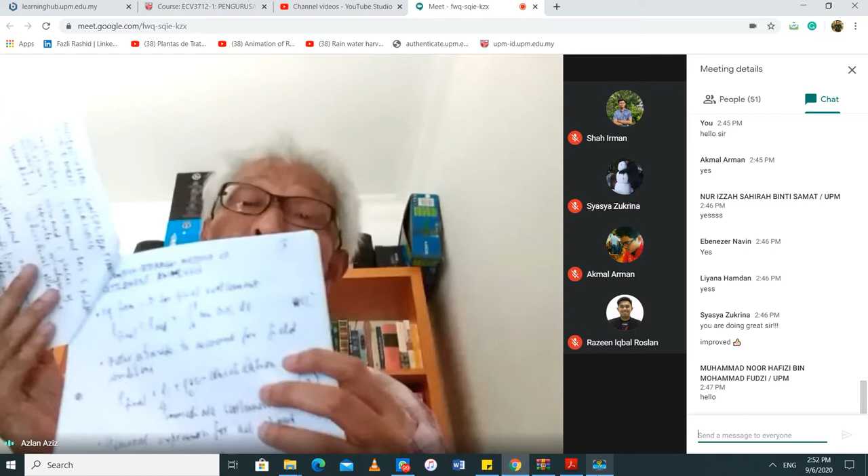Now, I sort of digressed from the main set of notes. It was supposed to go straight to page 3, but we digressed to page 2A, 2B, 2C, and 2D, because some of you may not have had the idea of what consolidation is all about, and that was why the digression was there. I did mention to you that as we went along into 2A, 2B, 2C, and 2D...

We did an example before that. We said to ourselves that the 4-meter clay is undergoing a consolidation settlement, and the question to you then is how to get the stresses at the center or in the middle of that thickness of clay. You have clay here, and because of the top part and the bottom part, you take the average in the middle. That's the depth of the stresses.

So you apply the stresses as the picture was showing you. In the example, you apply 125 kilopascal, and then how is this 125 kilopascal being distributed in this footing, which is a raft footing. You have a 15 meter by 30 meter by 45 meter footing, and the settlement obviously is going to occur in the center. So you split the raft footing into 4 equal spaces. That's why the word 4 is there in the example, 4 equal spaces.

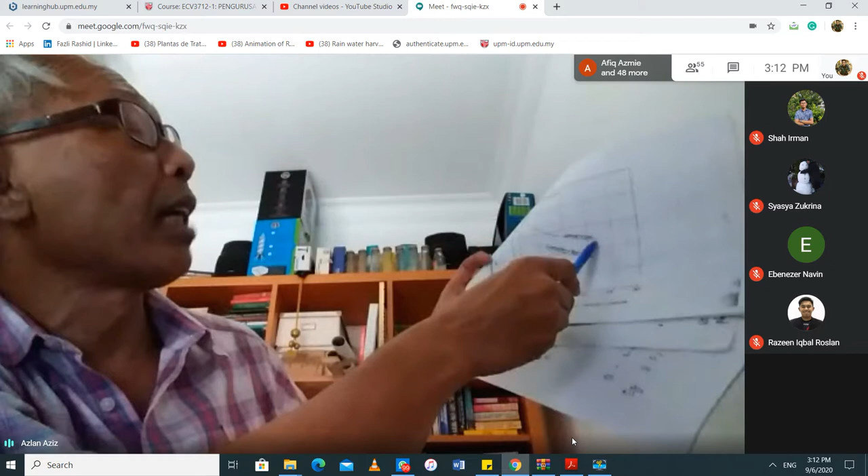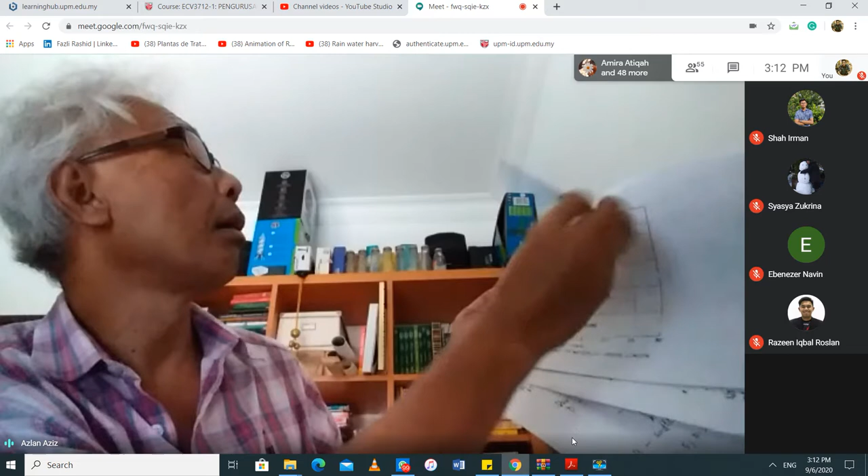Now, if you look at figure 14.2 again, just to give you an idea, let's say we use that conventional oedometer settlement. Let's say the total final settlement is about 50, and let's say the total final settlement would take some 20 years to stabilize. This is almost stabilized here, 50 stabilized, so it takes about 20 years. So 10 years after the application of the load, that's like, what is it? I'll take something like 25 so that it's easy for me to calculate. So this is about 50, say that's 20 years.

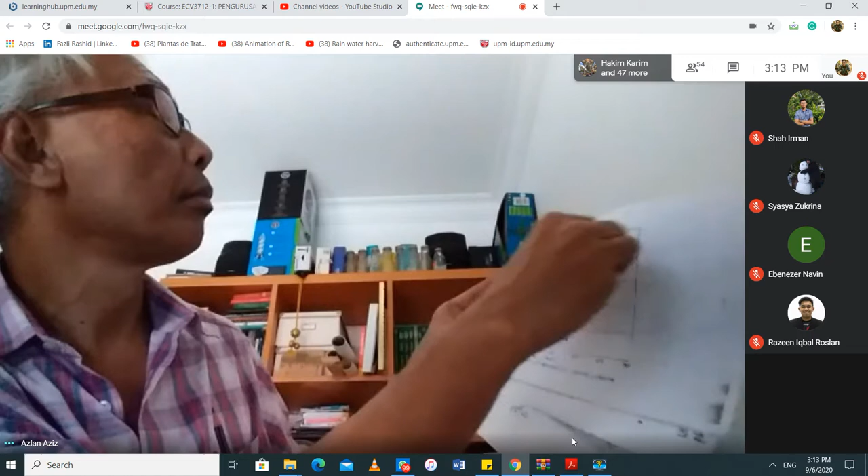So I want something that is 25, say 25 is 50% of the total final consolidation. So how many years do you get? Write to me, guys, otherwise I think you're asleep or you can't follow me. 25 millimeter out of 50, that would be... Send a message to everyone here, don't talk to me, just send a message.

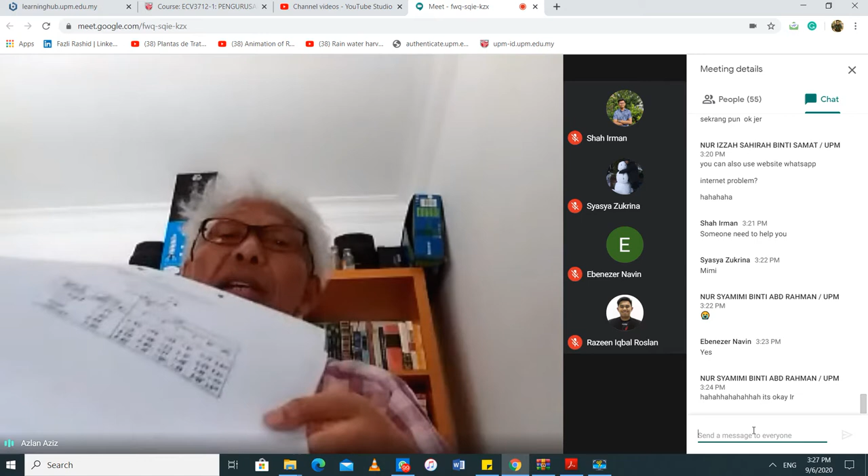I'm supposed to have 58 people, right? Where is my attendance list? Dah. Dah dapat? Yeah, I'm supposed to have 58 people, guys. I keep having 3 people missing in my class. Terima kasih. Those of us who are missing, make sure you don't miss your class on the day I ask for the homework. Then it becomes a problem. All right, so anyway, you have to...

Take the I sub P values from table 14.1, 14.2, and 14.3. Now 14.1, you guys said to me is on 14.14, but it's available even in this set of notes, right? Otherwise you're just going to look in chapter 14 and find it. Now Imran and Yuan has looked it up and they said that it is on page 14.14. I have here also table 14.3 and table 14.2. All right, but if I were to look at that table 14.1, all it says in there is the influence factors for settlement of footing on the surface of a semi-infinite elastic solid.

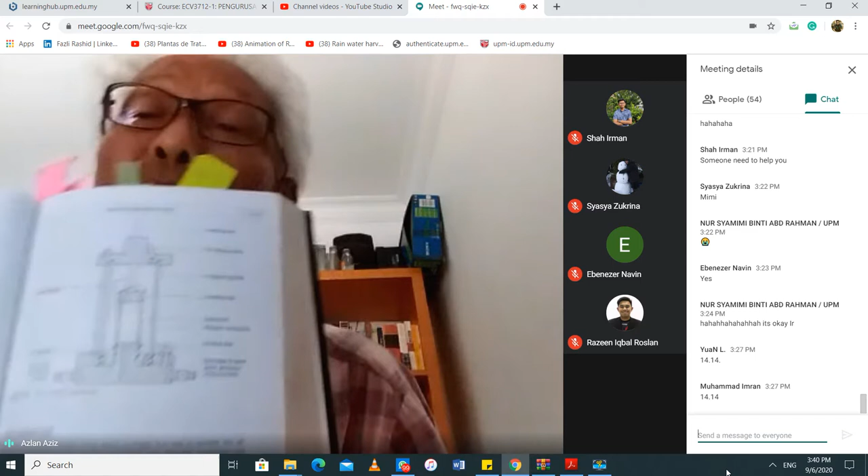So if I'm to look at page 114... okay, I'm on page 107. Remember, I drew this. Well, for some of you, some of the others are not, they didn't do soil mechanics 1 with me. All right, here's the triaxial cell.

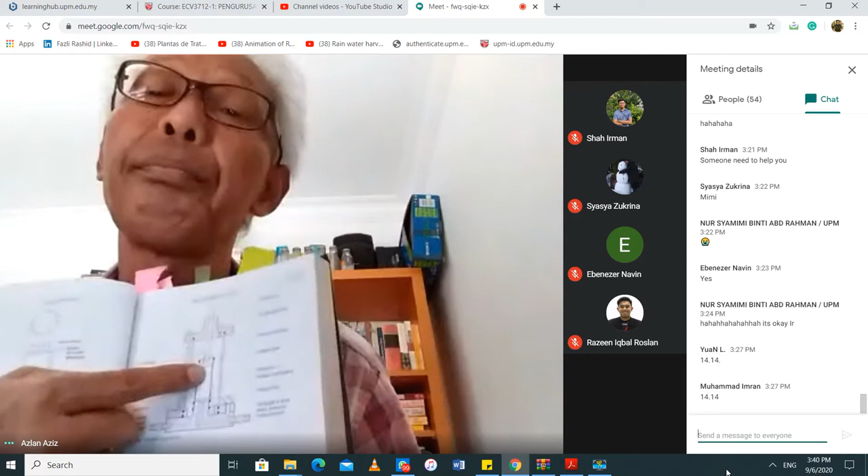Now, why am I trying to relate this triaxial cell to that B value? The B value is obtained when you apply all these lateral stresses and vertical stresses, and you can get that B value. So when they say Skempton pore pressure parameter is determined through lab test, they are using this triaxial cell on page 107.

So if the soil is fully saturated, which is the case of the clay usually, then the B value is equal to 1, and then you get all this delta U, which is the change in pore water pressure. Now, if I substitute that change in pore water pressure in the original equation, I get that mu multiplied by this long-winded parameter.

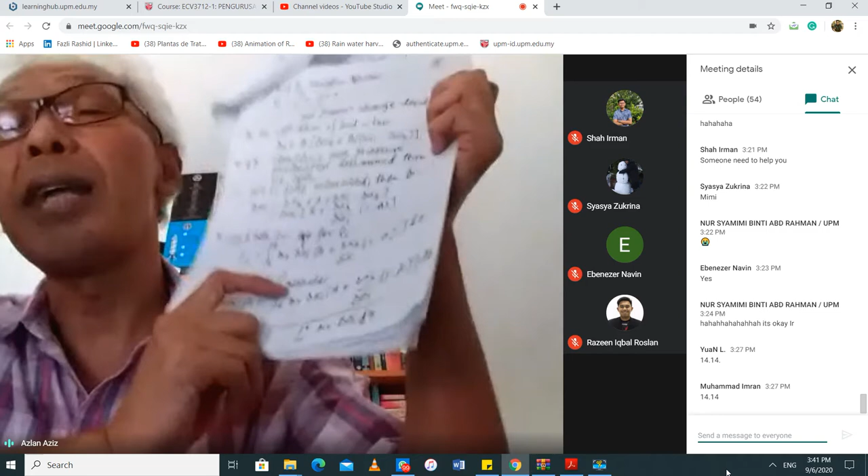In the end, you see there, right, on page 5 at the bottom here, you have this mu multiplied by rho oedometer. You recall that when I was trying to talk about this Skempton-Bjerrum method, I said that Skempton-Bjerrum would be referring to the oedometer test. And why would that be the case?

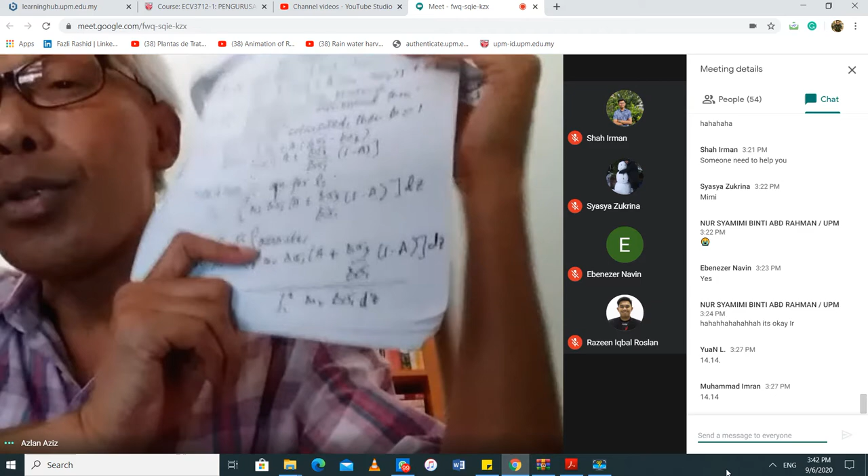It's because all of us are more familiar with the oedometer, since also last Friday we were able to calculate using oedometer results. So he has derived this equation here, whereby you find your rho oedometer, and if you do your site investigation and all you did was just take a sample, go to the lab, and did the oedometer test, and didn't do anything else because you forgot, or you are not so good at doing site investigation, whatever the reason.

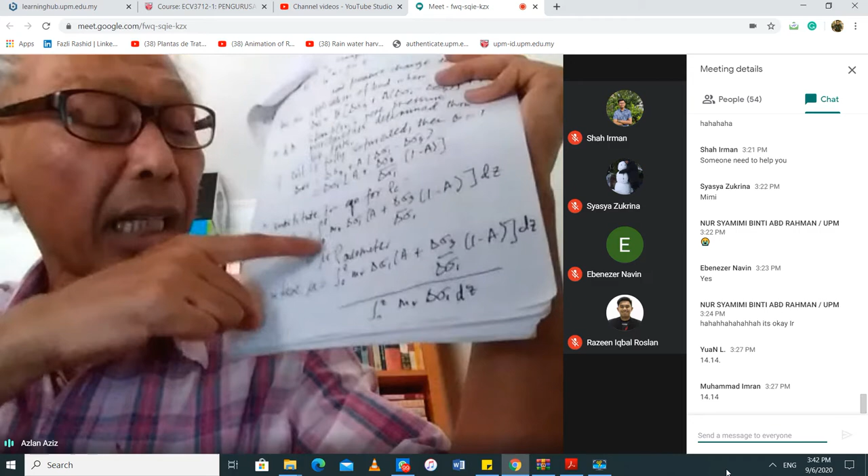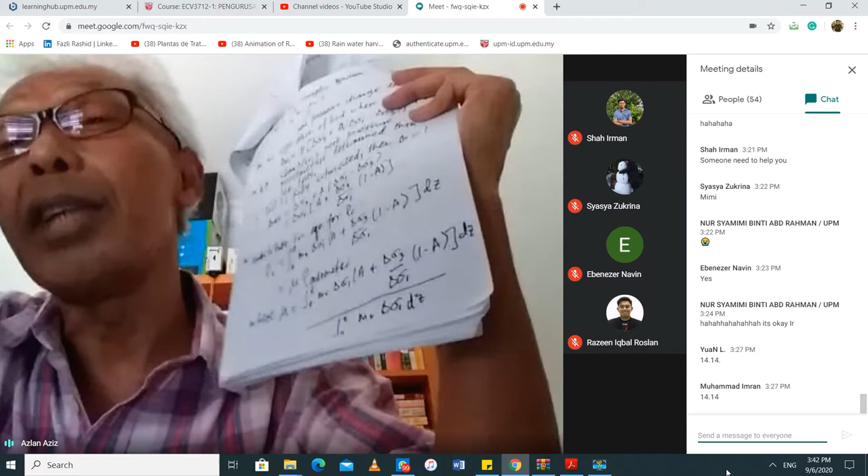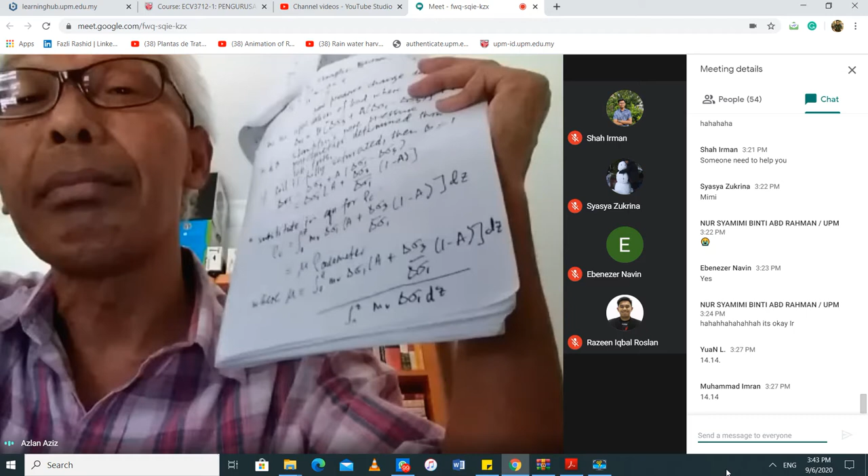So now you have that sample rho oedometer, so you can still find your consolidation according to Skempton-Bjerrum. They say by multiplying that rho oedometer with mu. All right, so you see just now on figure 14.2, I believe, in relation to the Waterloo Bridge, right? So if you had just done the oedometer test, to find that total final settlement using Skempton-Bjerrum, you just need to multiply that total final oedometer settlement with this mu, and mu is given by this.

Okay, fine, this looks so complicated. You say to yourself, by the time I get to 50 or 40 or whatever, I've forgotten how to even differentiate and integrate. So you are an engineer by that time, and you might not be able to do that anymore.

But don't worry, Skempton says and Bjerrum says, I am going to give you a chart, charts and tables. So you see that table 14.4 is going to give you the value of alpha. I'm already on the next page, guys, I'm on page 6, right? Okay.

Right, that mu is a function of, on the next page, on page 6, A plus alpha times 1 minus A. So if I were to look at these two, figure 14.9 and table 14.4, I can get my mu then, right? Now our problem is, of course, how to use this, how to use this in finding the settlement.

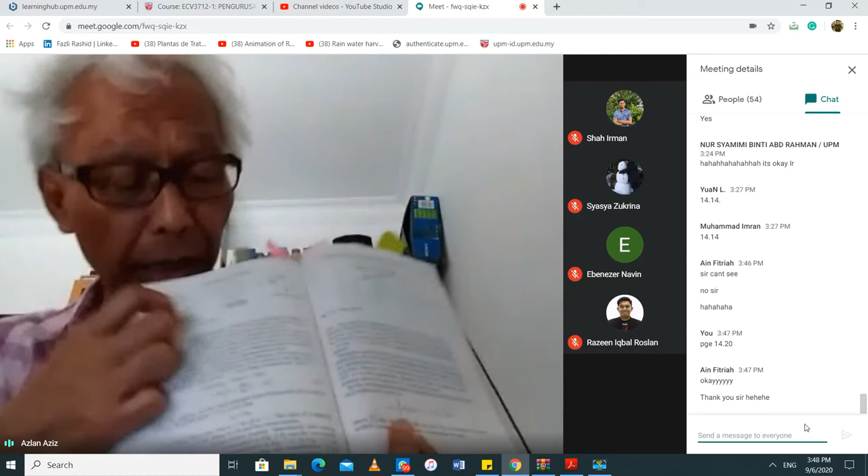Right, all those things I explained on the triaxial cell, you notice on page 256 you have the A and B factors and the increase in lateral and vertical stresses.

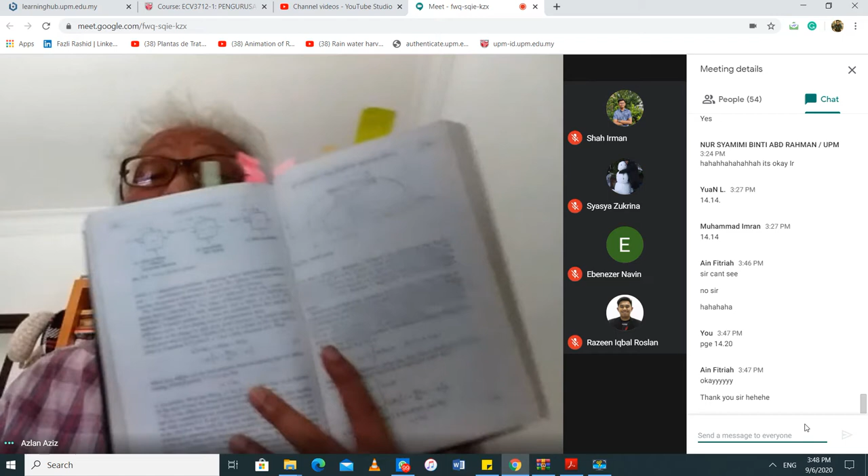Now, on page 259 is a similar chart to figure 14.9, circular footing and strip footing. In figure 14.9 you only have circular footing and strip footing, but most of the time we have square or rectangular footing.

So how then? In one of the examples in Craig's book, or sometime in the future if I get to that example, you can still use the same chart, but you change to an equivalent area. You make the circular footing equal to the square footing: one is pi d squared over 4, the other is length times breadth, or b squared if it's a square. Then you find the equivalent diameter d.

Some people ask me, the chart gives circular footing but I have square footing, what am I supposed to do? I'm warning you about all of these things so it is possible to handle all of that.

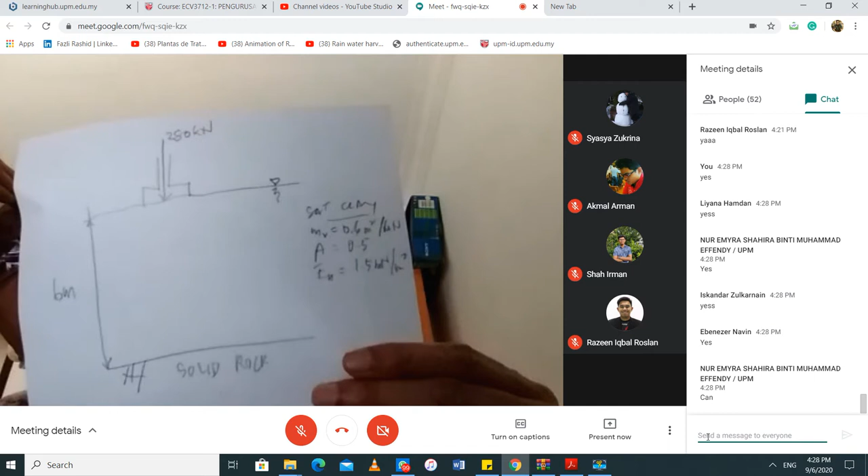Okay, so I've drawn the first paragraph and second paragraph into my schematic, right? So you should get something like that. Can you see this? Hello - Liyana says yes, Emyra says yes, everybody says yes, Ain says hello. Okay, so you get something like that, right? About right?

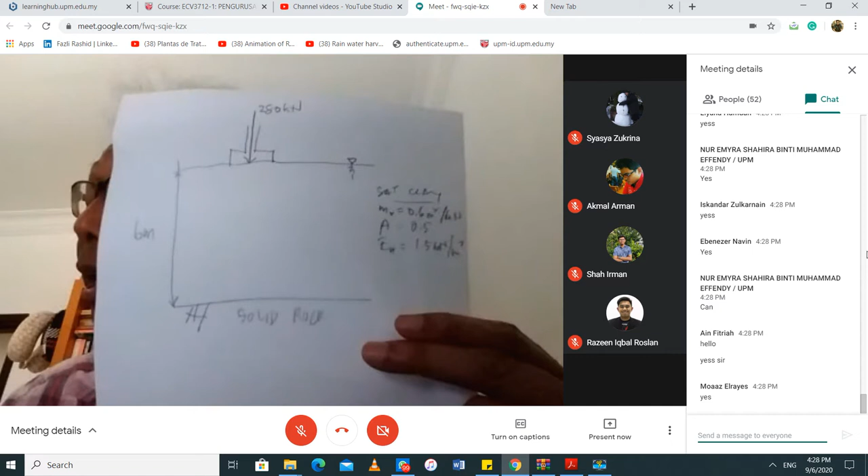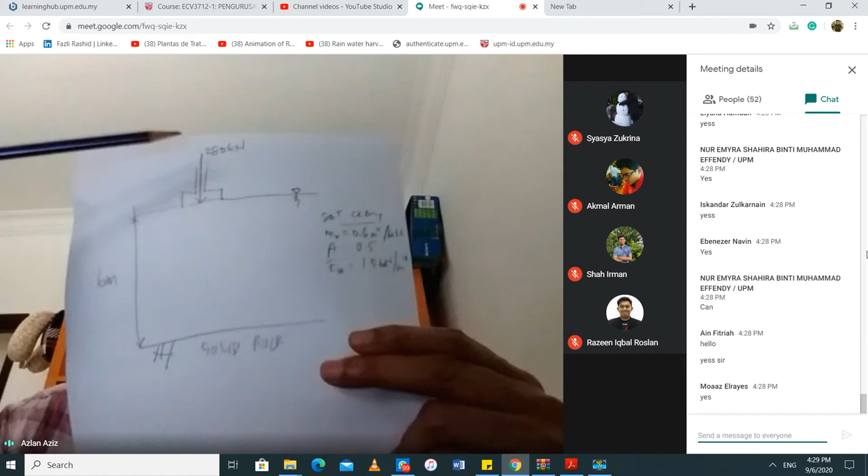Okay, now the third paragraph. It says you're going to calculate oedometer settlement by means of the 2:1 stress transmission approximation discussed in section 7.5. The calculation based upon 3 two-meter thick clay layers are tabulated below. I'm tired, guys. Okay, first focus on that 3 two-meter thick clay layer - I want you to draw it. I have a vertical load being applied to my 6 meters, then divide the thickness into...

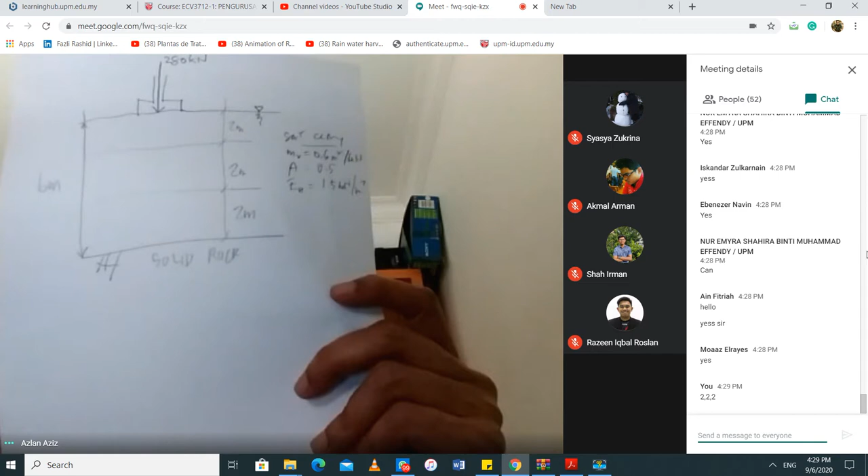Okay, that should be easy. So you should get that. Right, so it should be something like this. See, I have 2, 2, 2. This is still the same clay, and I have solid rock at the bottom here.

Now it says the oedometer settlement of the 2:1 stress transmission approximation, discussed in section 7.5. If you don't have that with you, section 7.5, I want you to now take your Craig book, and then open to this page. It's not going to be the same thing, but it's for you to understand what I'm trying to say.

I'm on page 345 and I'm looking at figure 8.23. It's about piles, but you know, the picture is similar.

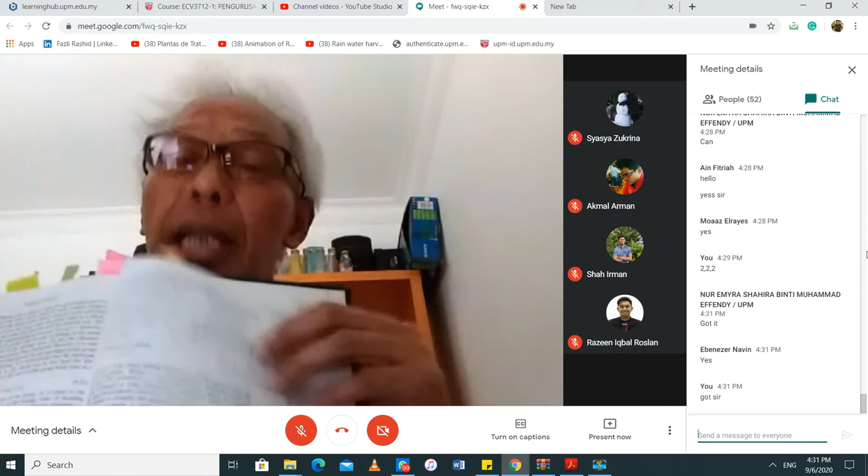Can you give me an indication that, okay, Emyra says she's got it. Anyone else? Abby says yes. Okay, now you see here, all right, I just show here. Okay, Fazli got okay. You see this? All right, it is piles.

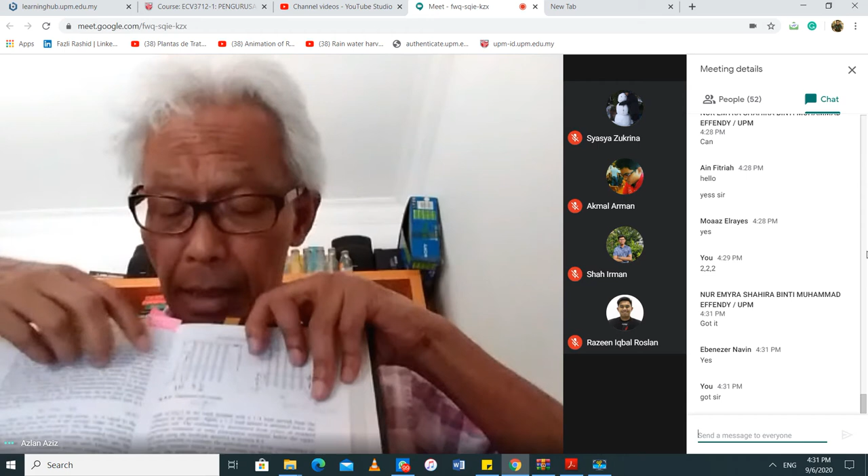But what they are trying to say here, I'm jumping the gun a bit, all right, I'm bringing forward some of this knowledge. But what is important is for you to realize that they have two layers here, for example, in this one here. And then they have the pile on top of the pile cap, they have the pile. But you notice that they have this ratio of the stress transmission on the side, 1:4 and 1:2.

Can you focus on that and tell me that you're actually getting it? Akmal says yes, Fazli says yes, Amy says yes, Abby okay, Ain says yes.

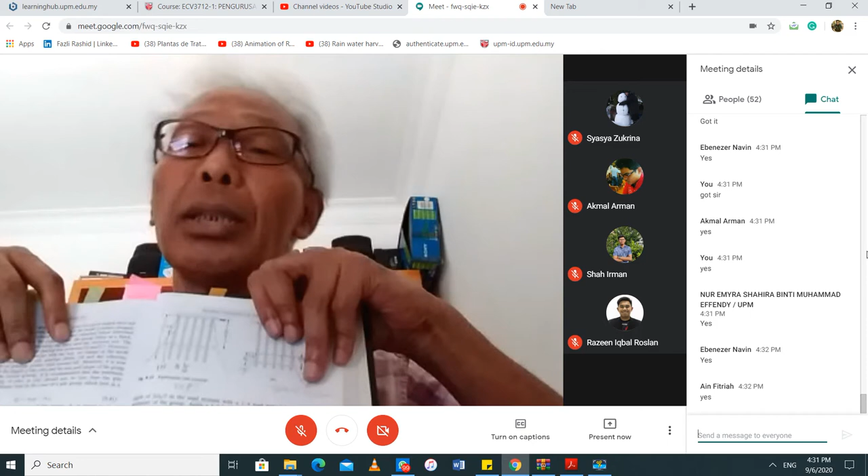All right, now when they said, going back to our example, when they say by means of the 2:1 stress transmission in that paragraph, they mean that 1:2 on page 345. So actually 1 is the horizontal and 2 is the vertical.

Okay, are you guys clear? Okay, Fazli says okay. So can we draw that?

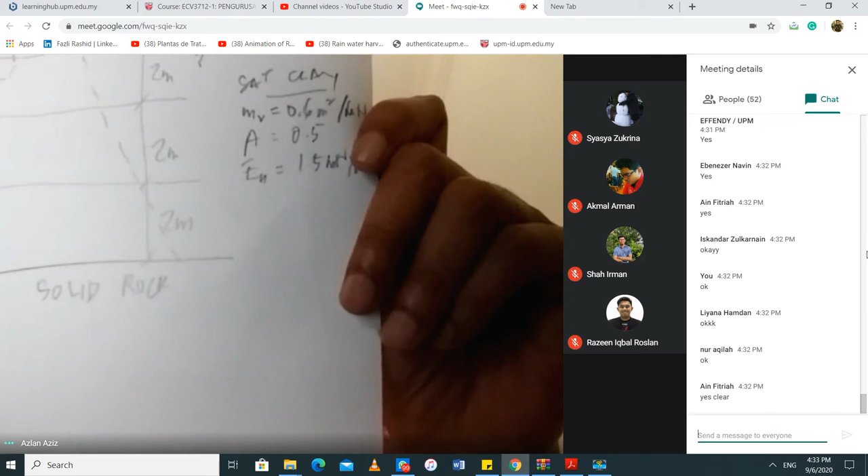I don't know whether I'm right. You guys have to tell me because I'm half asleep already. I'm tired.

Clear, tak clear? Amy says okay, Hafizi says jap sir. Shafiq says clear. All right.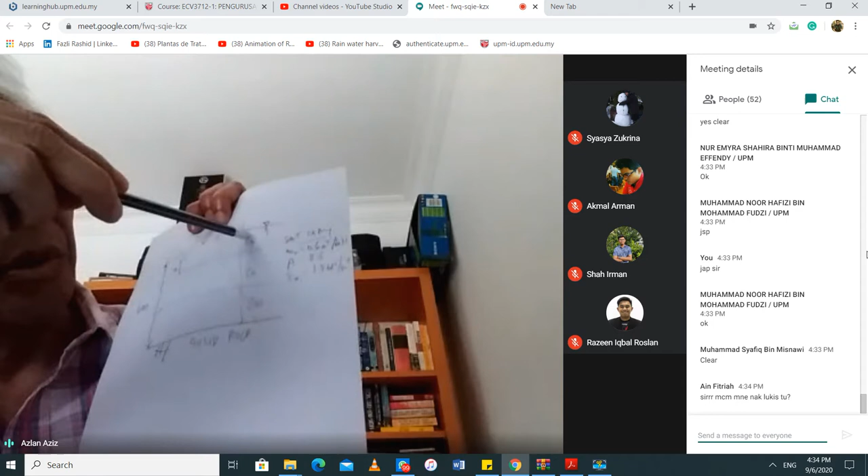Okay, now fine, all right. So now I have these three layers of the same thickness. This is the same thickness. What I'm trying to do now is find for each of this small layer, I have 6 meters initially, I'm going to find the settlement in the first layer, the second layer, and the third layer.

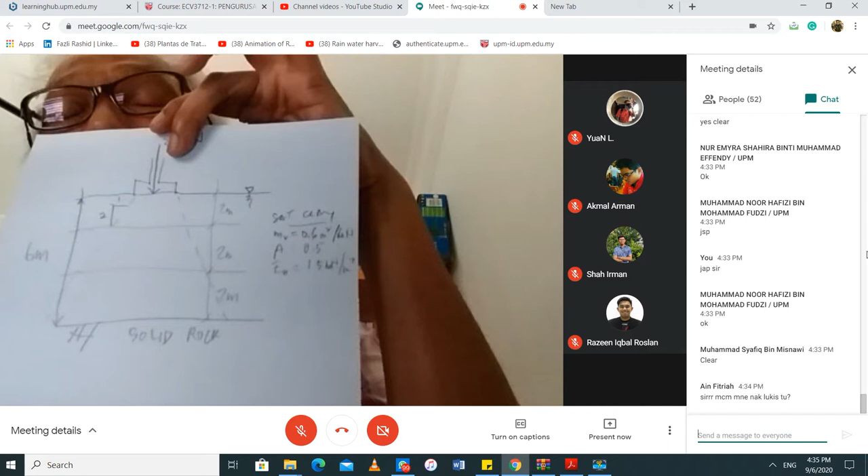See, you draw this, fine, 1:2. Why is it so important for you to do this?

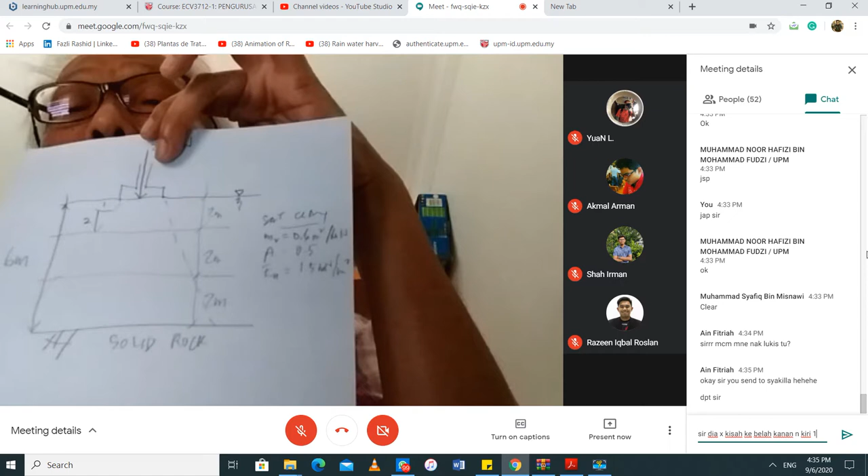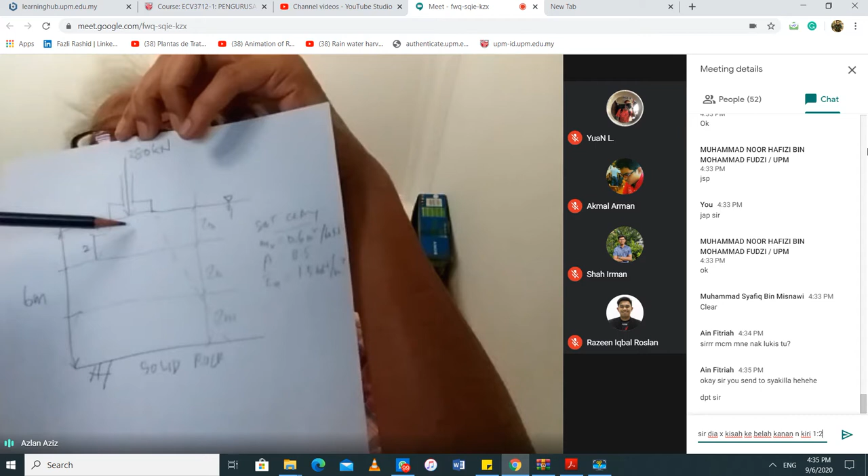It's because, all right, my next step is to say to you, okay look, there is this vertical load, which can be changed to a stress, all right. So it's just a load divided by area, and then it's going to be transferred to the first layer, to the second layer, to the third layer. So as I get further away from the surface, my stress should be less, because I'm further away from the stress.

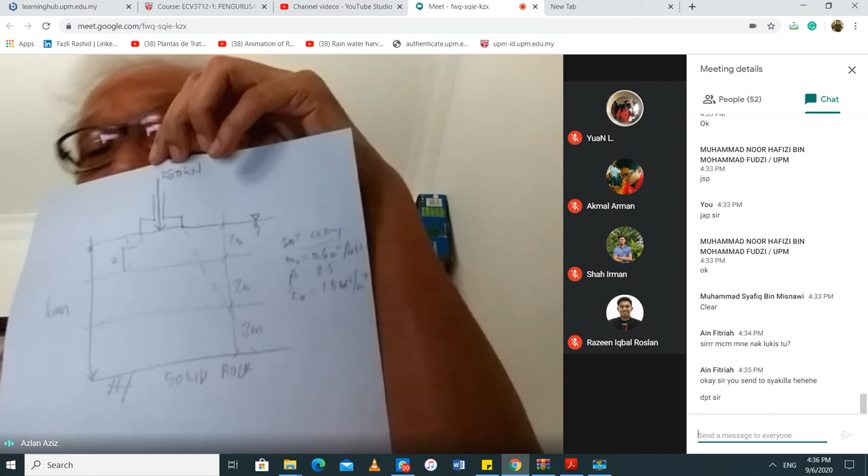Okay, now I want you now to focus on the halfway point of the first layer. In other words, my depth now is 1 meter from the surface.

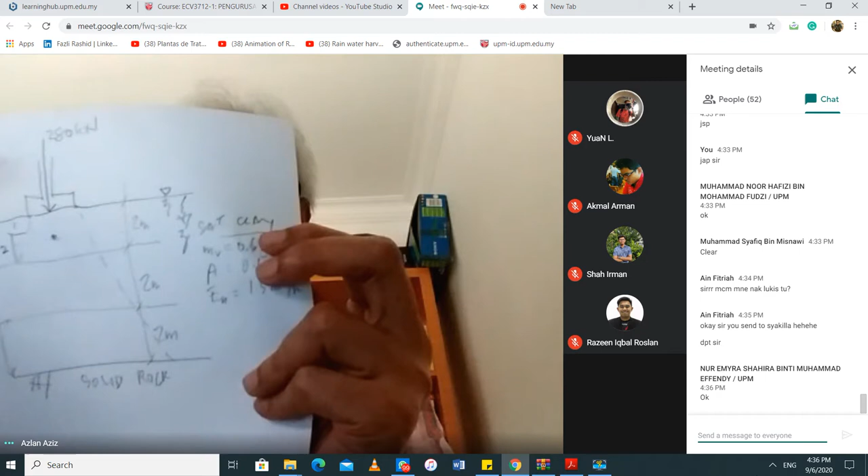Okay, all right, so now I am going down. I'm going to put a symbol Z. See my symbol Z here? And I'm going down, Z is 1 meter. See, Z is 1 meter somewhere here.

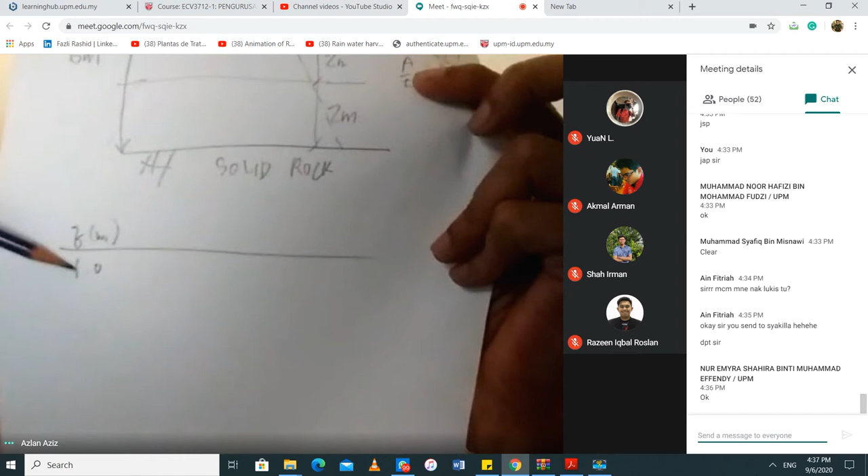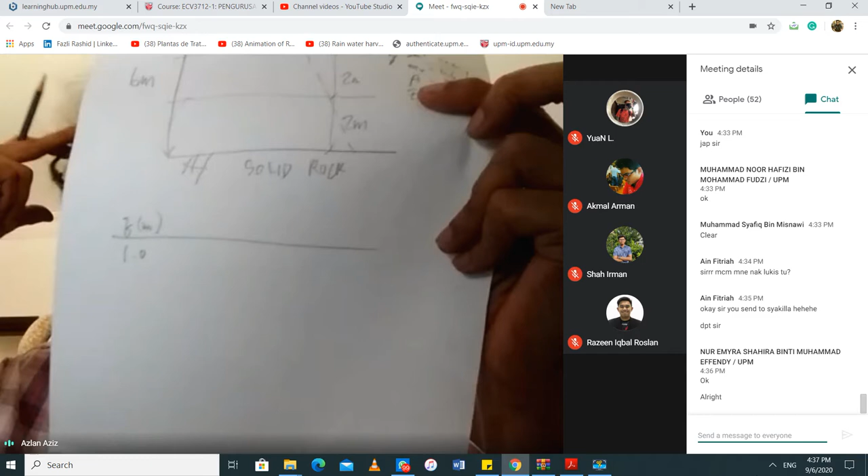Okay, so I'll put in my table Z equals 1 meter. See my table now, Z is 1.0 meter. All right, are you guys okay?

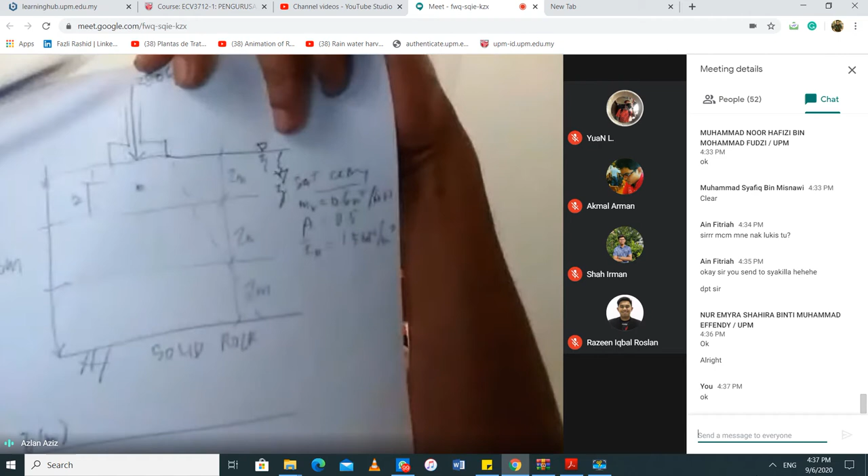At Z equals 1 meter, using that 1:2 stress transmission, I want you to tell me what the area is, what the width is at 1 meter depth. In other words, let me go back here. See, I have this footing on the surface. I have a width here, which I hadn't put in.

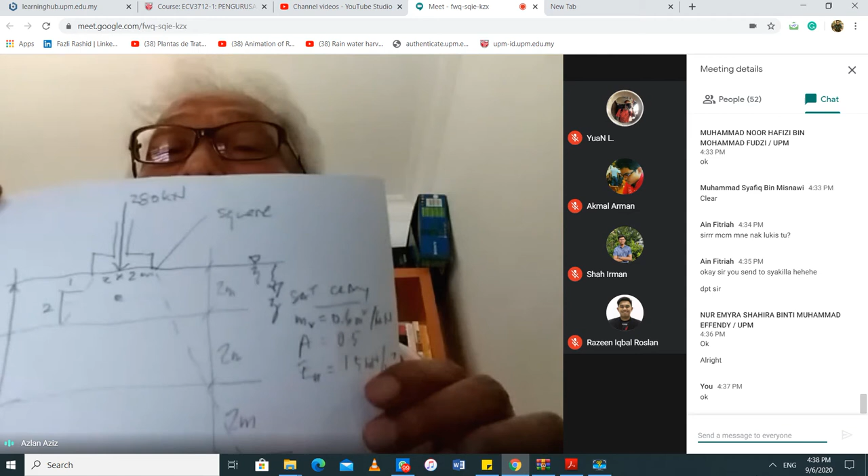So if I go back to paragraph 1, it says 2 meters square. So I'm going to put there 2 by 2, 2 by 2 meter square. See now, I have a square 2 by 2 meter. Can you see it? Nampak tak? Okay, Emyra says nampak, Iskandar says nampak, Liyana says nampak, Fazli says yes, Ain says nampak.

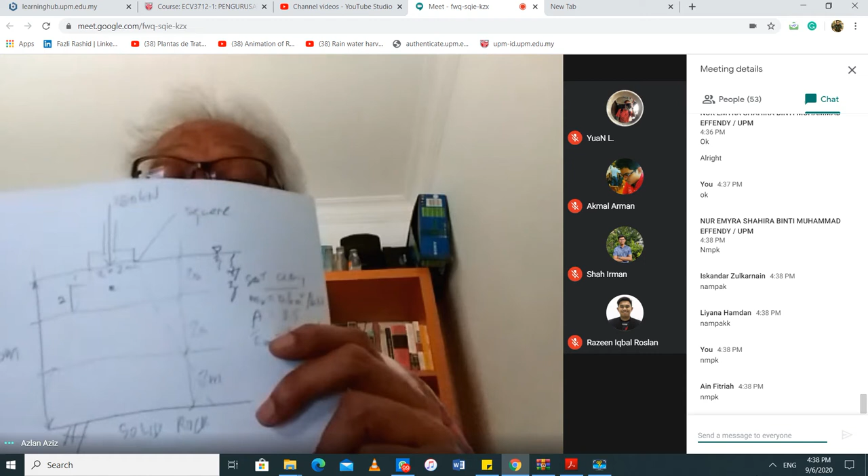Okay, now this is at the surface. Now Z is 1 meter. What is the width here at 1 meter? And ratio 1:2, width.

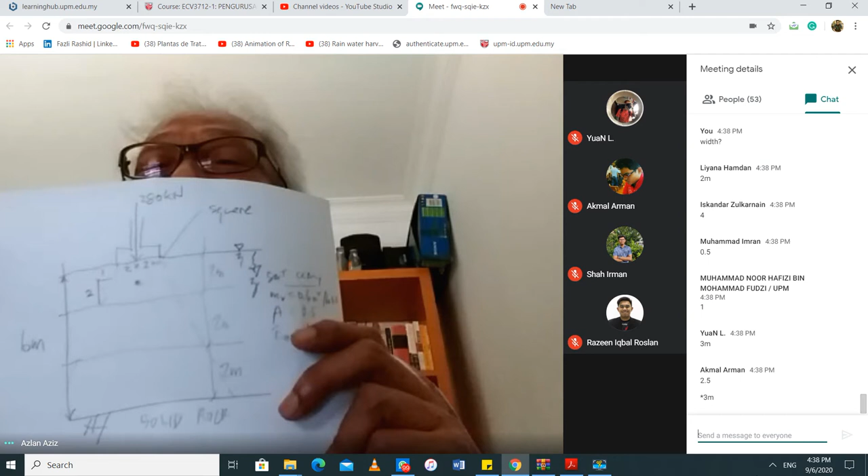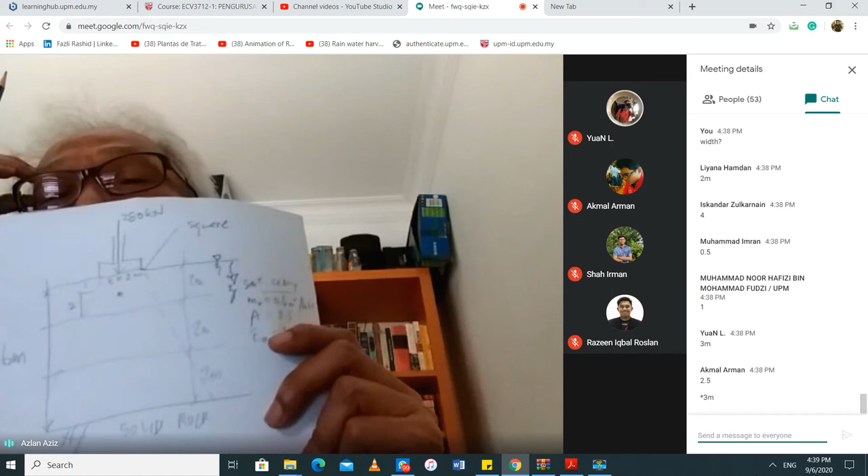Liyana says 2 meters. Iskandar says 4 meter. Imran says 0.5 - 0.5 terbalik kot. What is the width? Be careful, calculate carefully. Arman says 2.5, maybe 3 meter now. I don't know, are you sure now?

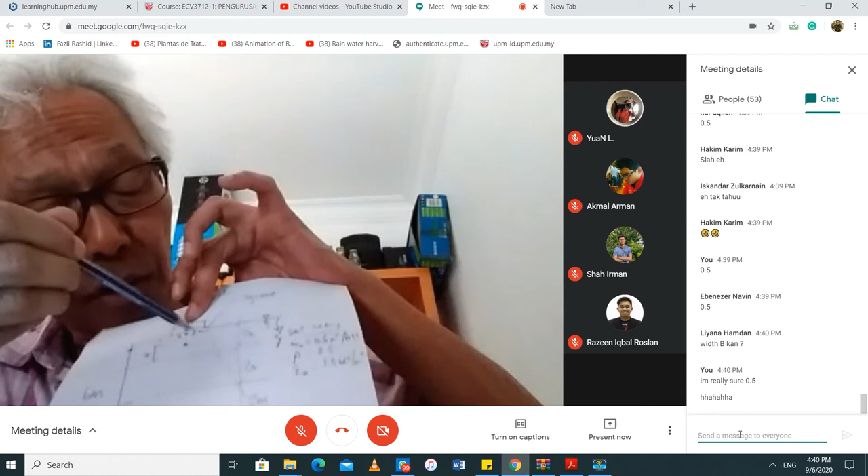0.5, no way. 0.5 is not the total width, AB. The total width at the top here is 2, so the top here is 2 meter. Okay, now 1 meter down, it has to be more than 2. Sure? 0.5 is wrong, Bazli. It has to be more than 2, isn't it? Now Iskandar says 4, Abby says 3, Razeen says 3. Yeah, sure now?

Okay, all right, so that's where the important thing is. Maybe after this you discuss among yourself. So now, I want to find the width at 1 meter. Why 1 meter? 1 meter is in between the surface here, 2 meter thickness. All right, I want to find the width.

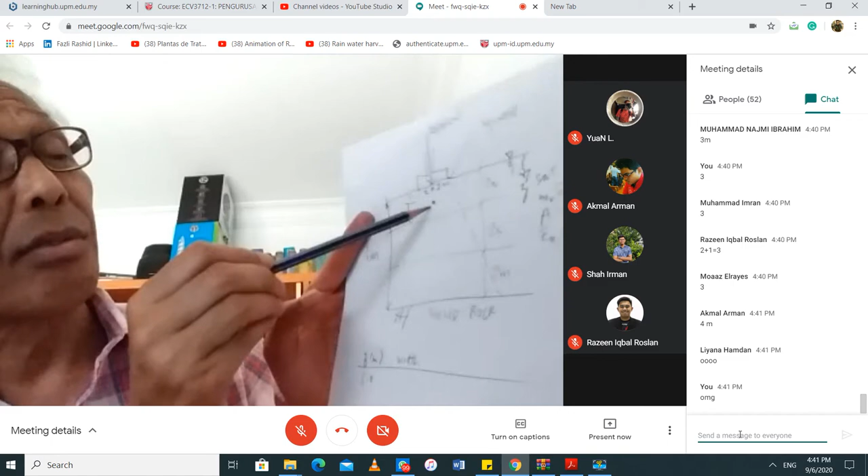Now, at the surface, you see the surface here, 280 divided by the area will give me the stress. Okay, 280 divided at surface - I'm just going to write here. 280 divided by 4, which gives me 70 kilonewton per meter square, kilopascal. That's at the surface.

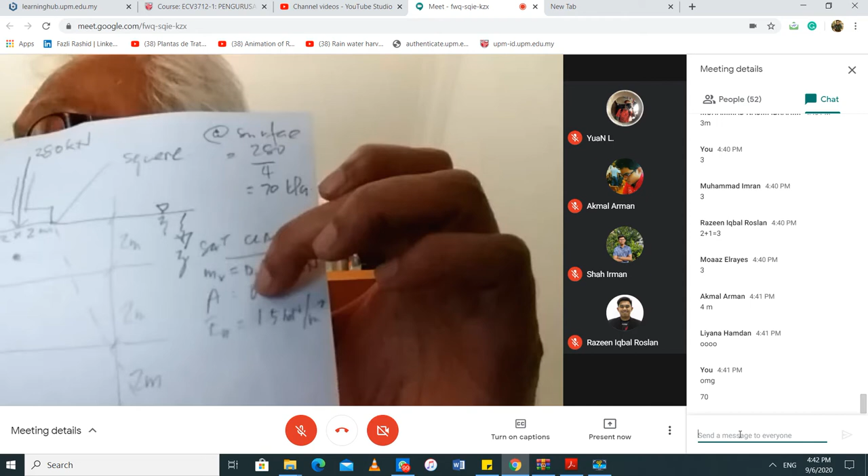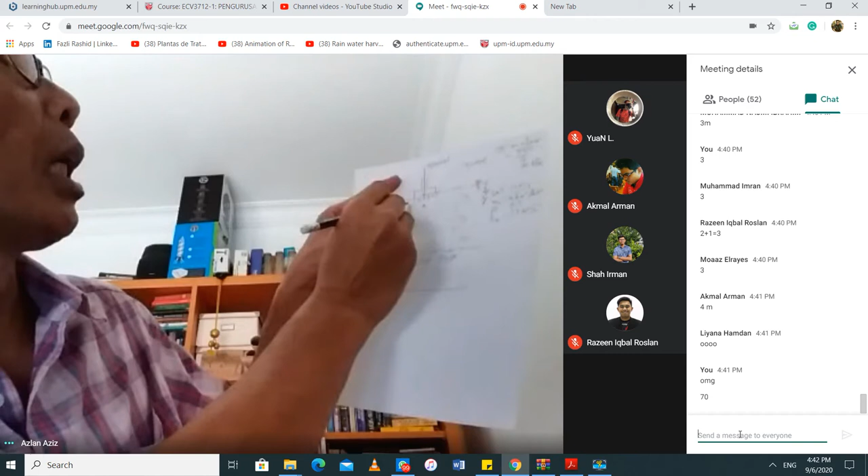Now, at 1 meter, I'm going to find the width. So it has to be - see, I have here 2 meters, then I have to find out what this is. So it has to be more than 2 meters. For every one horizontal, it's 2 vertical. So for 1, I should have 0.5. So 2 plus 0.5 plus 0.5, I should have 3. Am I right? 3 meters, right? Moaaz says 3 meters. I could be wrong, okay.

Now AB says yes, Moaaz says yes. You see, so I should have a width of 3 meters. I'm going to put a question mark - you're going to find out. Now with that 3 meters, 3 times 3, right, 9, I can find the stress, like I find the stress here. Okay, so I should get the stress now.

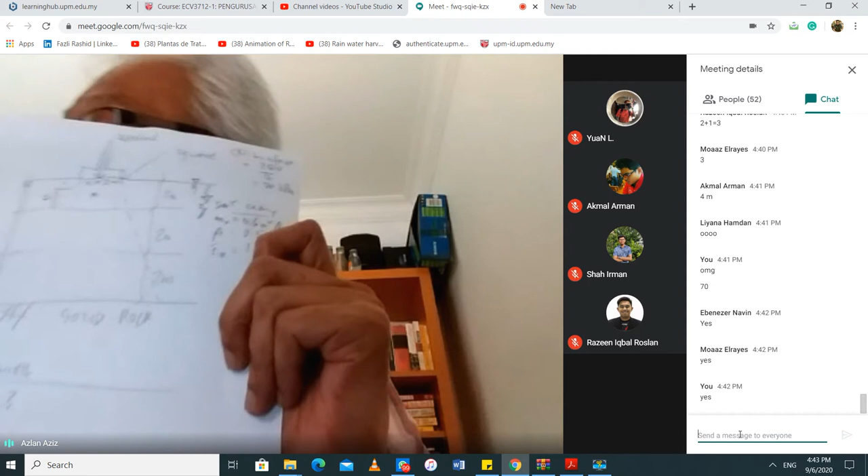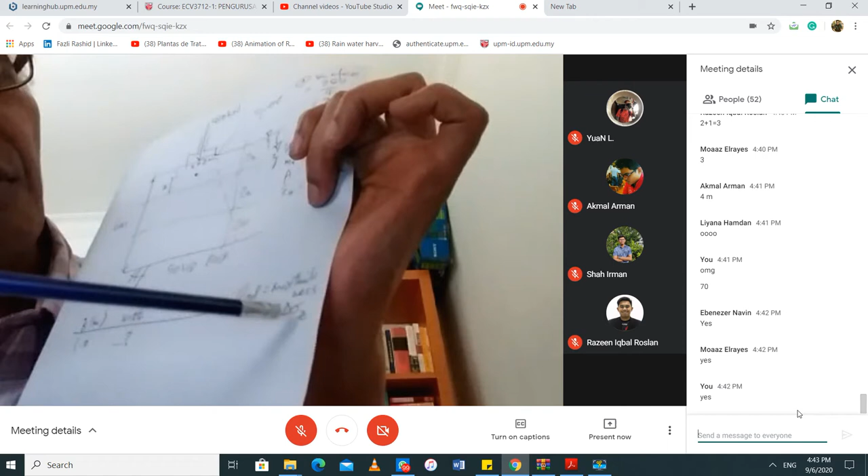Why is it important for me to find the stress? Because the stress now is just the rho oedometer. Finally, in that column, rho oedometer is equal to m sub v, multiplied by the thickness, multiplied by the increase in stress. Look at this column, look at the m column. M sub v multiplied by the thickness multiplied by the increase in stress. This increase of stress is going to be 280 divided by the area of this width that you find.

That's delta sigma. The thickness is always 2 meters - 2 meters, 2 meters, 2 meters. So m sub v is a constant. So that's where the problem is, to find this area, width and area. And then you will get all the settlement.

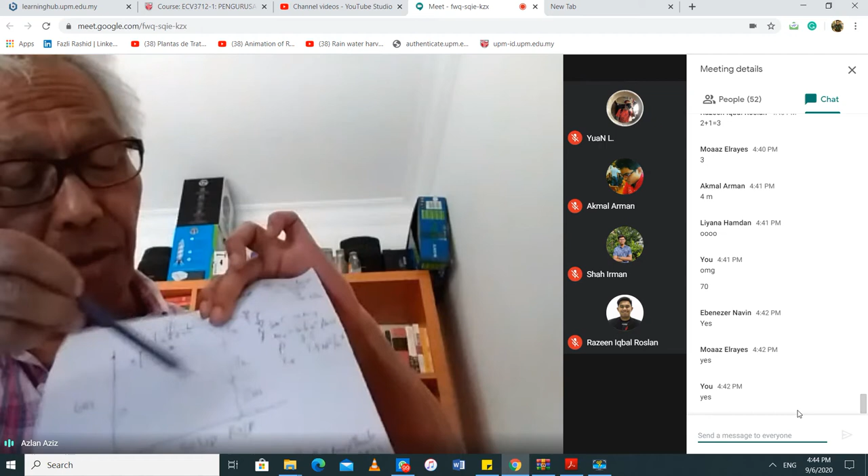For the next, then do it for the next second layer. All right, second layer thickness here at 3 meters, there is 2 meter difference. Okay, and then do the next one at 5 meters. So then you repeat that whole process.

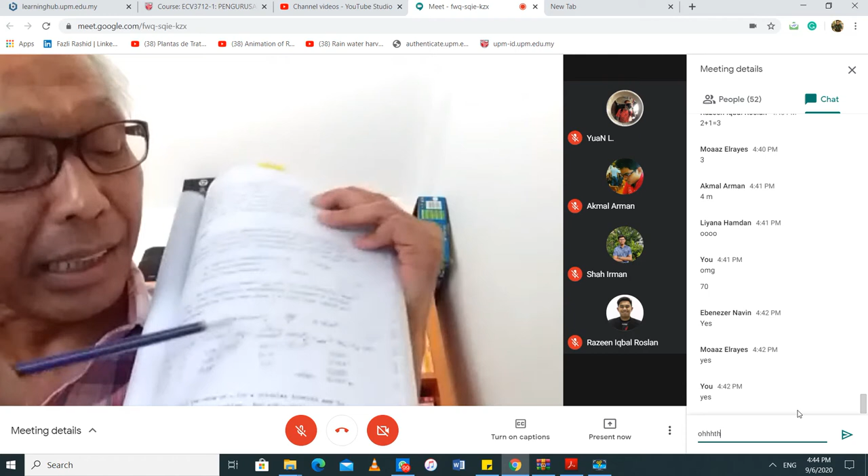So when you look at this example here, when they talk about this example, and you have it 1 plus Z plus B, blah, blah, blah, blah, all of that - I don't want you to do this. I want you to understand the principle, because this mathematical way of doing this doesn't give you the physics. I understand what is being done here, but you don't understand. You see? So when you do it this way, you have 1:2, right?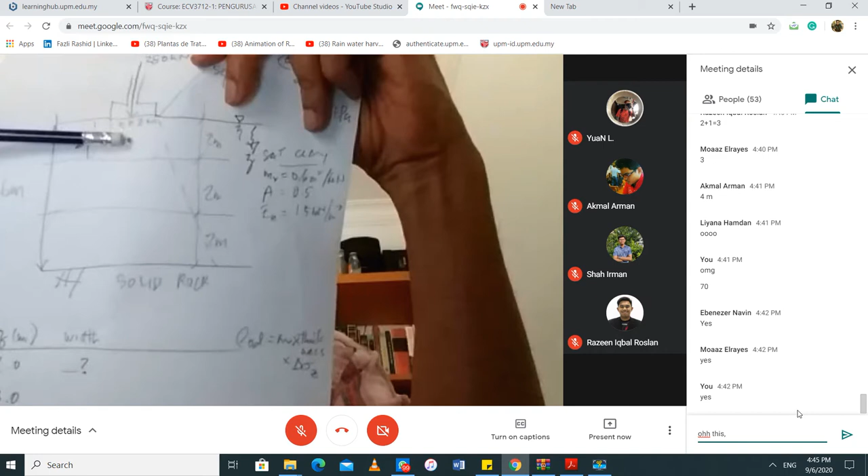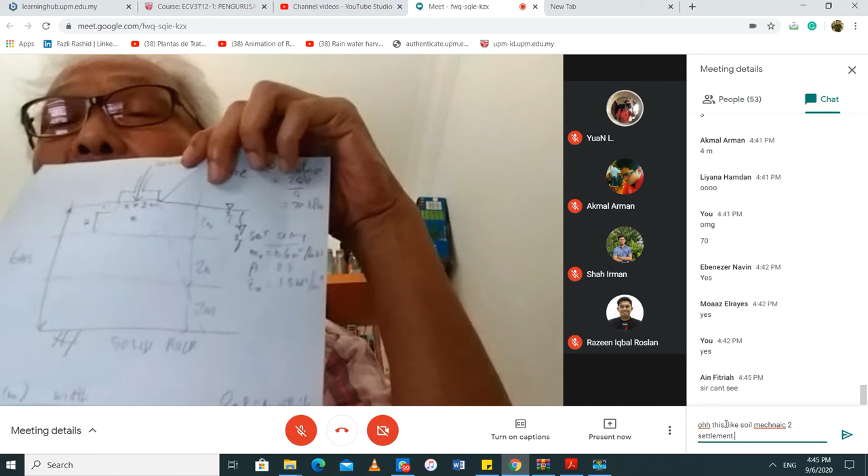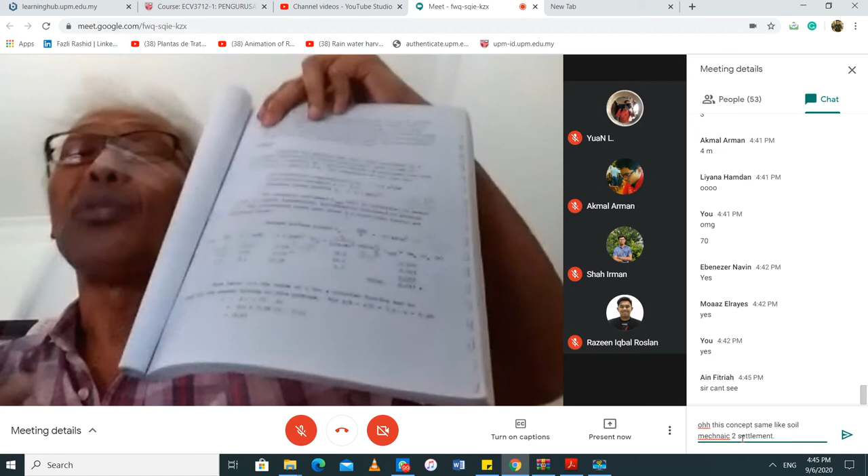This transmission, 1 vertical, 2 horizontal, find the area. The vertical divided by the area at the surface, then find the width here, find the area, and 280 divided by the area will give you the stress. Then find the increment of stress as well, because the area keeps increasing due to this 1:2 ratio. So the stress will be decreasing as you go away. So redo this table using what I explained to you.

Fazli says this concept seems like soil mechanics settlement. Yes.

Now that is the oedometer, 2:1 stress transmission. So now from table 14.4, the value of alpha for a circular footing may be used for the square footing in this problem. Remember I said earlier, if in the chart you have a circular footing but now you have a square footing, you use it for this problem. So if the depth Z over B equals 6/2, that equals 3, and alpha equals 0.29. Then U is found by sticking that in, giving you m_v, and then you get the consolidation, rho sub C.

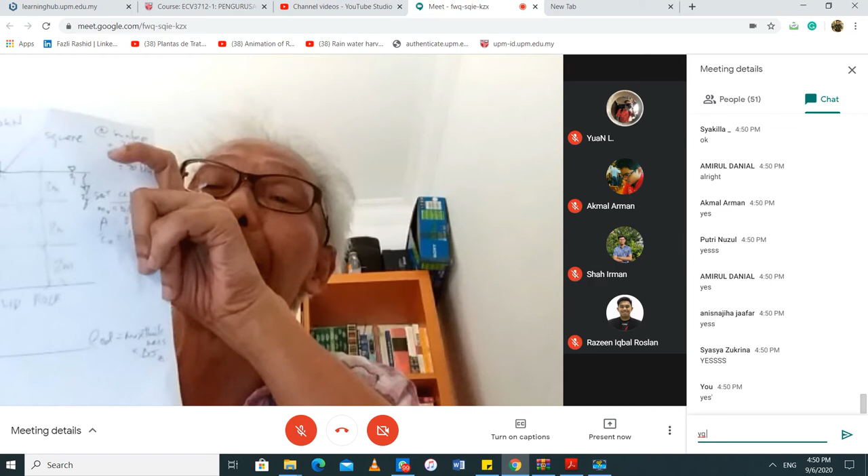This example is on page 14.22. Do you still want this page that I drew? You need it? I think you guys didn't do it. Okay, whatever it is, I may not write the right thing, but you better discuss it among yourselves. I'll take a picture right now so I don't forget, and then I will, God willing.

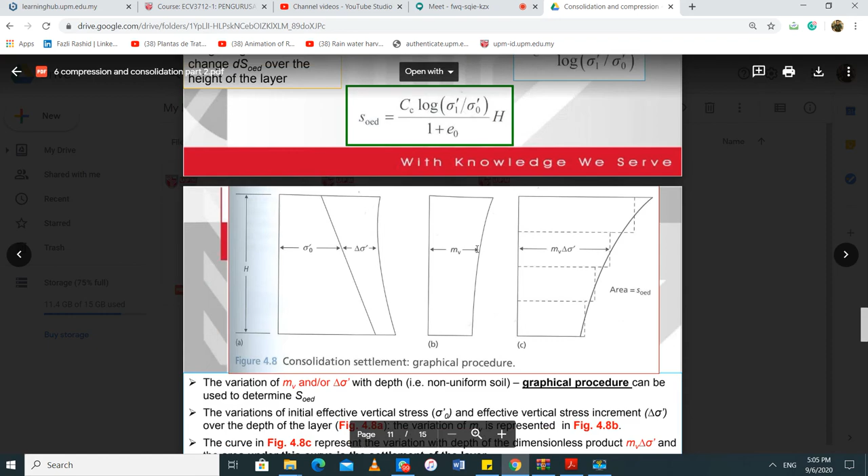You see? So if it is, you know, you see, Iskandar, you said similar to test one - you know, test one, you guys are late - it will be harder than test one. And it will be like, you know, because if it is the final exam, I may only be able to give you 3 days.

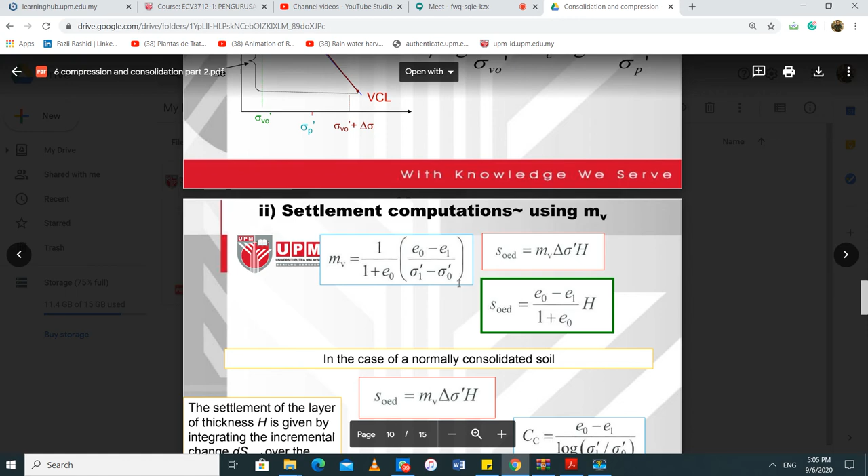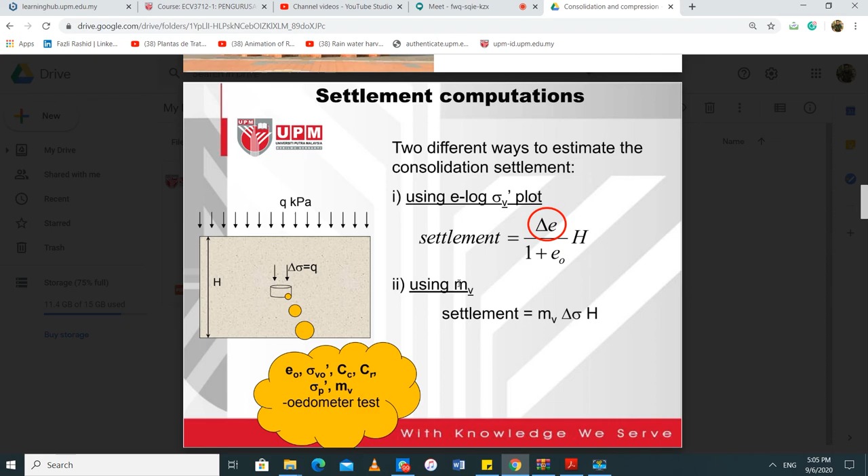Paling lama, why 3 days? Only because, you know, I have to give in the answer script to the registrar and all of that. And at the moment, I'm having problems trying to even gain access to the ESMP.

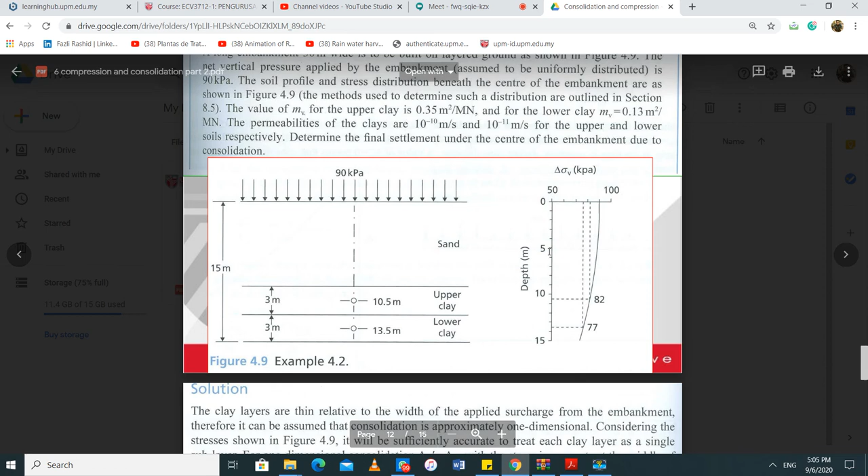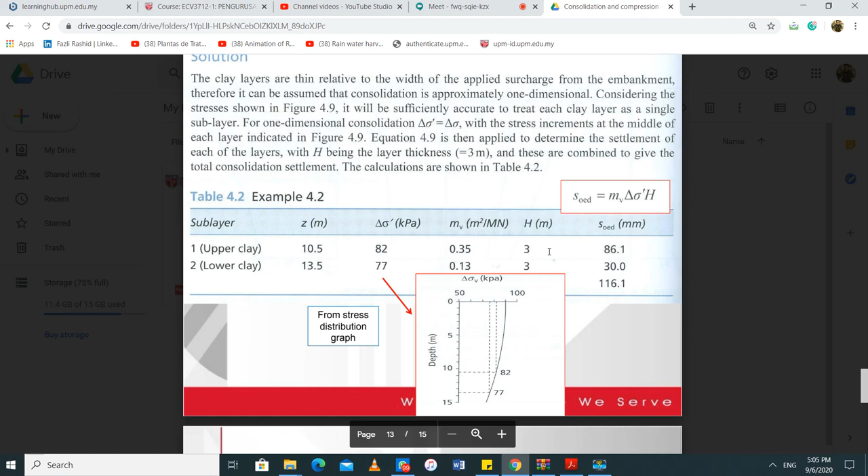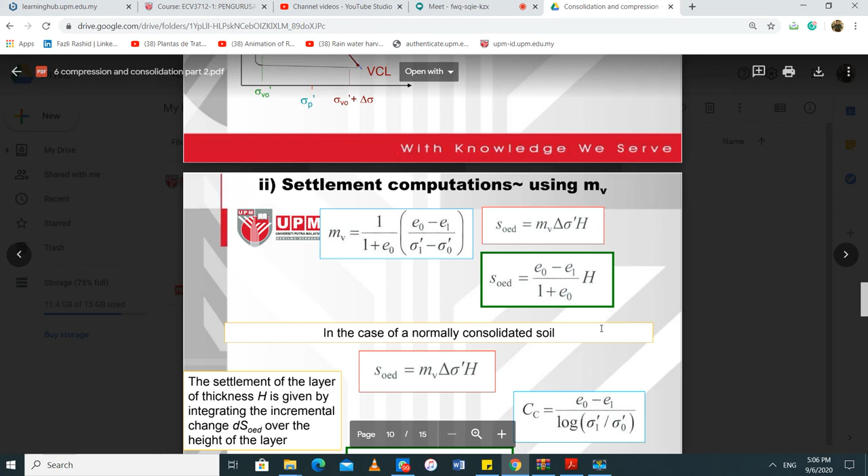Shamimi, you're saying if it is a coursework, but final exam is online assessment, so what on earth are you talking about? You see? This is why I'm having a conversation with you guys right now. Nak change final with assignment or something like that - mana nak boleh, if they say online assessment.

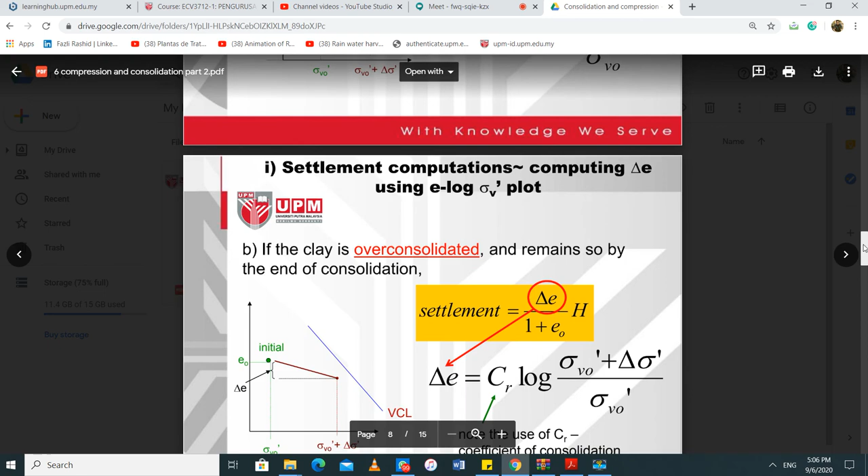You see? That is why I'm thinking that I shouldn't do any online test for test 2. I'll just pick up some questions and that's it, kan? But for the final, I'm warning you, things may not be the way we want it to be. You might not get your A then. You see? All right.

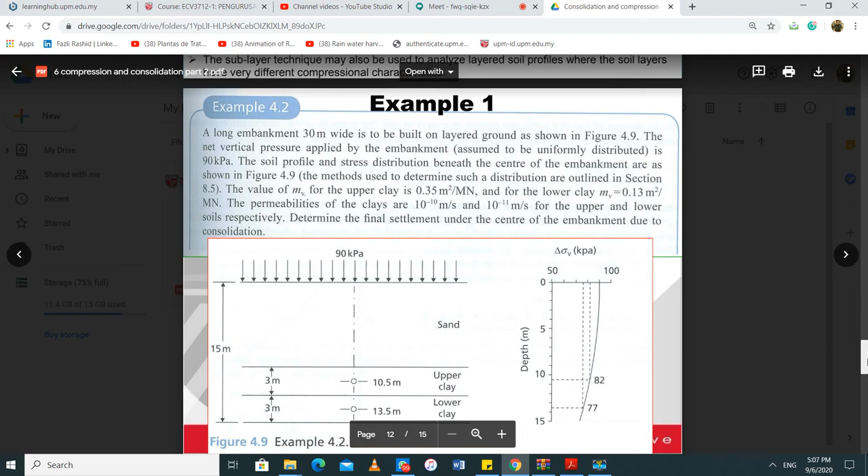Okay guys. By the way Arman, was Aziz's question very straightforward?

Was it 2 hours? 1 hour and a half, I think. 1.5 hours. How many questions? 3. AB says not enough time.

You see, that business of not enough time is like quality control. You realize that question too, you don't have enough time because it's also quality control. You see, it's like you either know how to do it or you take some time, right? And 1.5 hours. Fazli says 3 questions, some people say 1.5 hours, 2 questions. Apa ni?